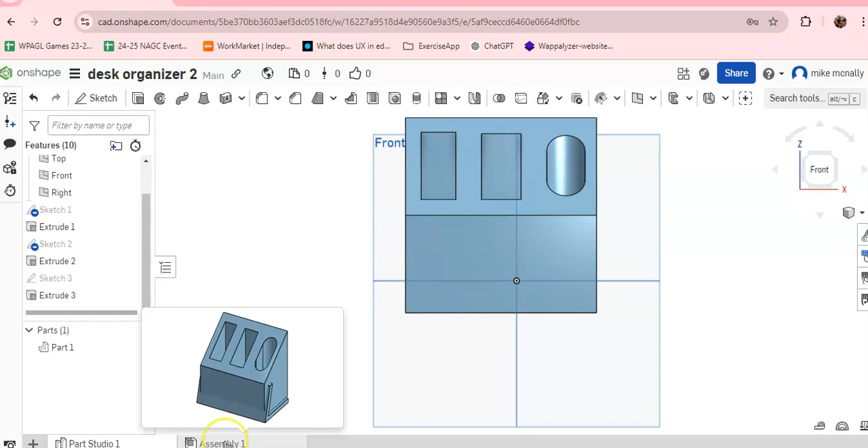Now, in this video, we have our desk organizer and we have the nameplate in another file. I'm going to show you one way that we can put this desk organizer together with the nameplate in the same part. And to do that, we're going to go into assembly. Okay, and I'm going to delete that.

So once you're in assembly, this is what it's going to look like for you. How did I get what I had there? I'm going to say insert, and we could have current document, other documents.

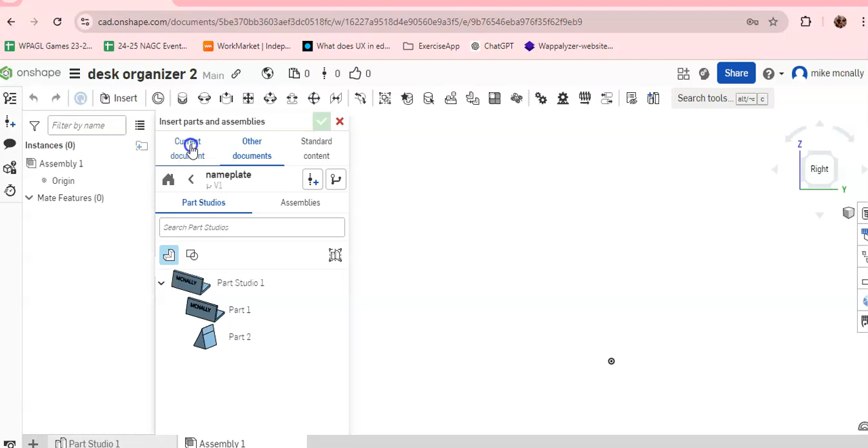Let's say current document, and there's the desktop part. You should see that, okay? And so I bring that in. You can move it around, and once you have it here, if you click on it, it's gonna. If I check mark this and then I click on it, you have these.

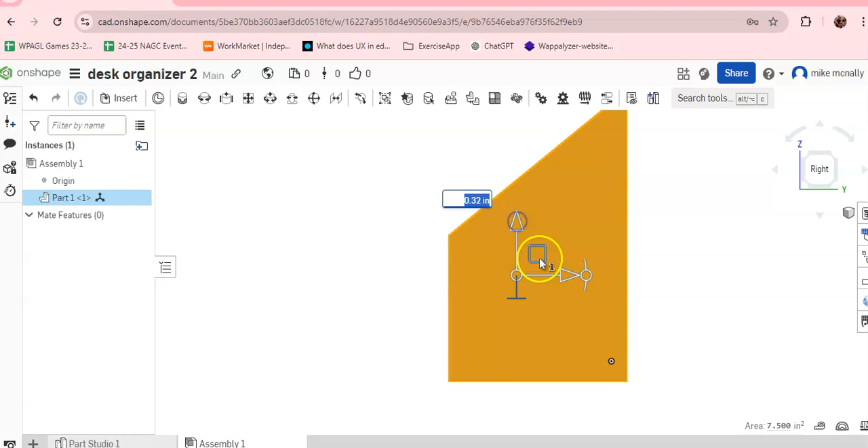You can move it up and down. You can move it back and forth. You can turn it and stuff. You can play around with that. I'm going to put it back to 0 degrees, so it's the way it was. Okay, so I've got my desk organizer part.

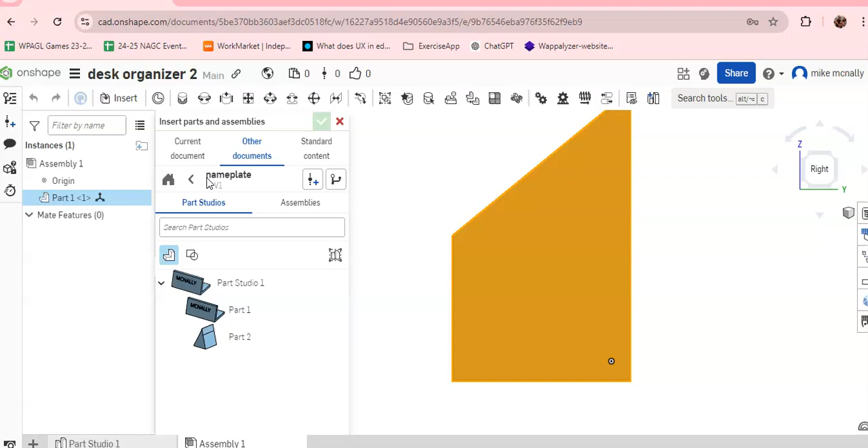I'm going to go back to insert, and I'm going to go to other documents. And you can see that for mine, this was here. You may have to go up here. When I first did this, it said it wasn't versioned yet. And if it says that, go ahead and say create a version or whatever it asks you to do. But I'm going to click down on nameplate, and now I've got them both.

Great, and I can move that around where I want. But I'm just going to leave it here for now. I'm going to zoom out, just put these sort of side by side. Okay, great, let's go ahead and check mark that.

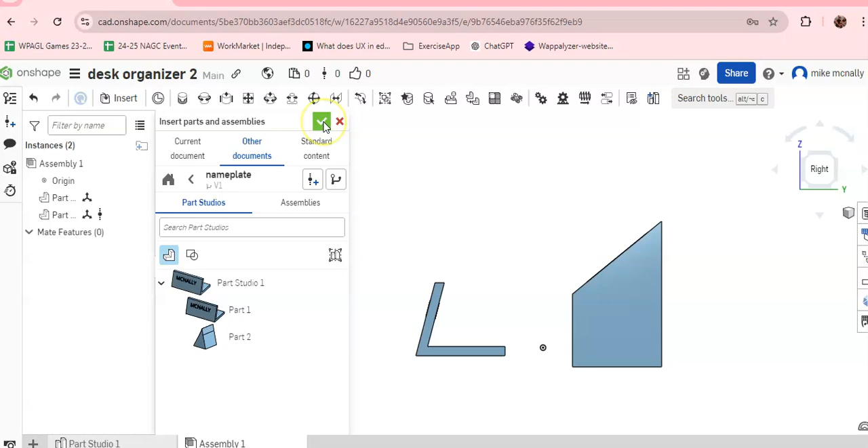Now, the cool thing about the assembly is that up here, these are called mates. And once you get really into complicated parts that you want to make, these things would become really helpful. So I'm just going to show you a simple one called the Fastened mate.

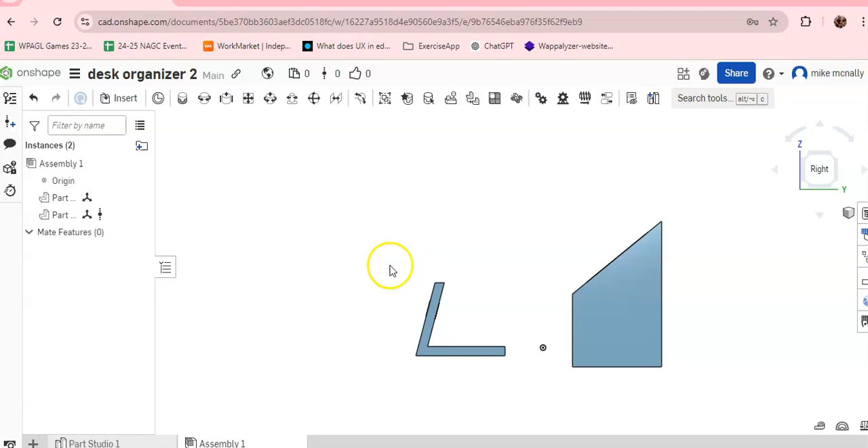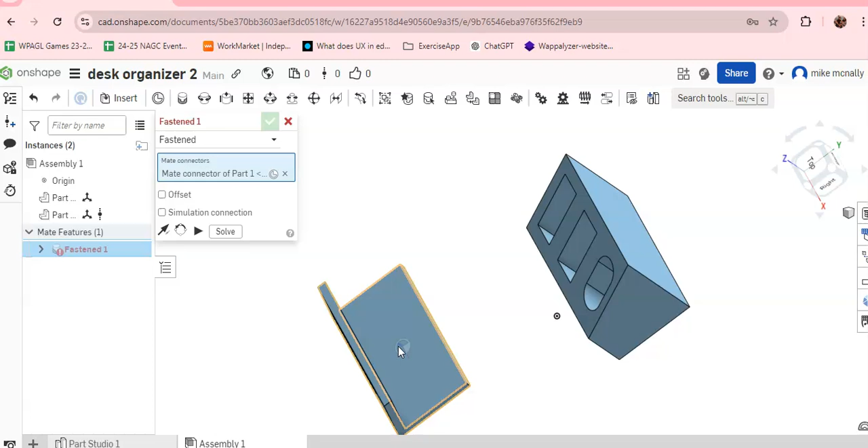So you got our nameplate, and we've got our desk organizer, but I wanted them to kind of be one part. So I'm going to hit my Fastened mate. Now I'm going to use my arrow key and kind of look at this from the top. So I want to connect right in the middle of my nameplate. And what do I want to connect right to the middle of my nameplate?

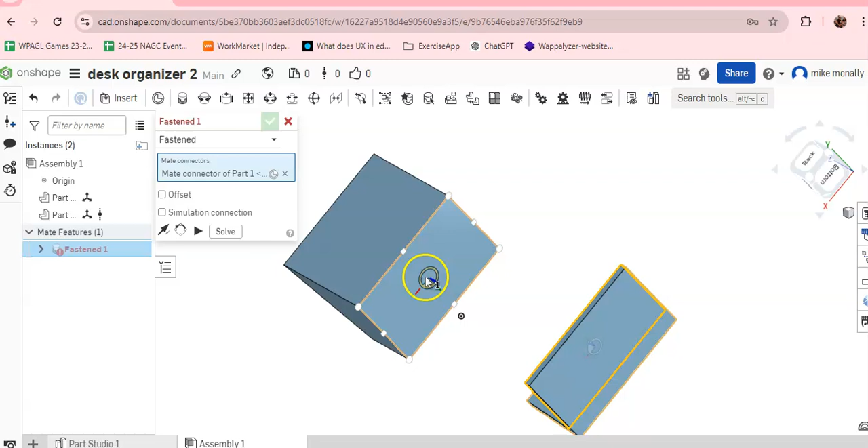And if I hover my mouse over it, I want to connect right the middle of the bottom of the desk organizer to the middle of the other thing. So I already gave it its target. Now what do I want to match to that target? This. And it put it together. Let's see what happened.

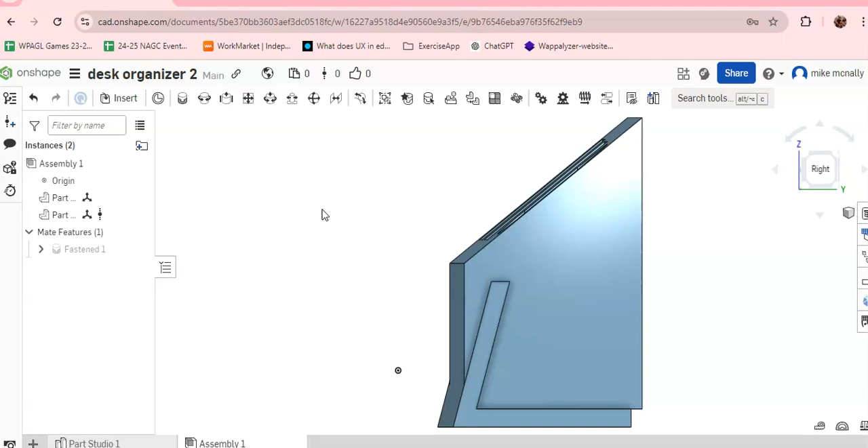Click on right. Okay, not what we wanted to look like. Oh, look at that. My nameplate was slanted, but my desk organizer wasn't.

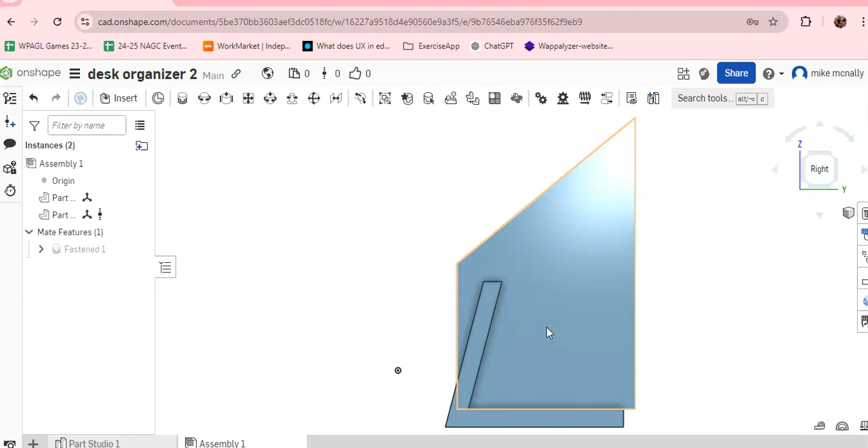There's a few things you could do. You could go back and make these match up perfectly. I'm going to show you a quick way, and this is just kind of interesting how this happens. I'm going to go back to my part studio.

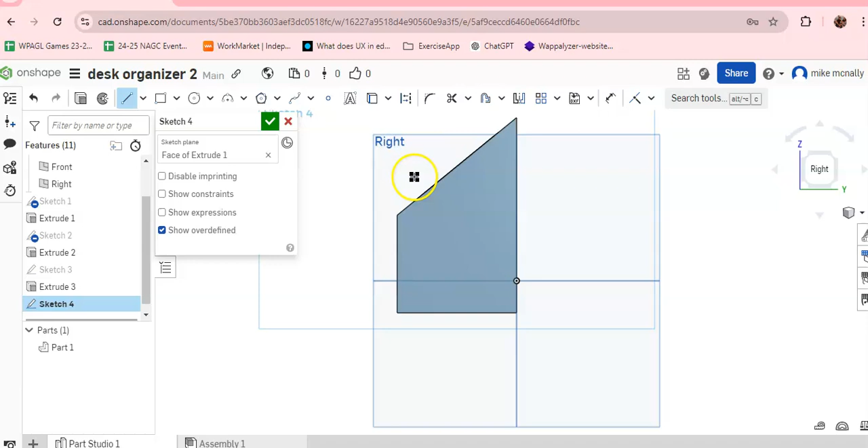Right on here on the side, this is where it wasn't slanted the same way. So I'm going to sketch on here, and I'll say right on the side, grab my line tool and go from here about, I'm just guessing. Let's just see what happens. Here, here, here. I'm extrude. I'm going to say remove.

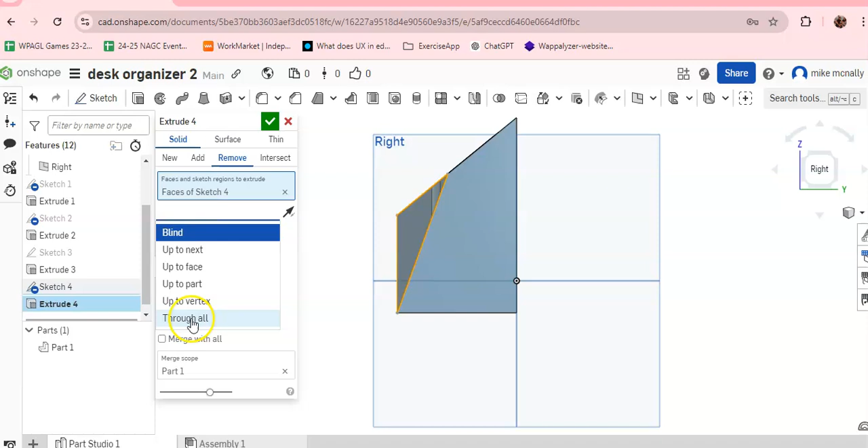And change blind to through all. Okay, so, okay, I don't love that, right? Stuff would fall out maybe. There's a little bit at the bottom. But let's go back to assembly and see what happened.

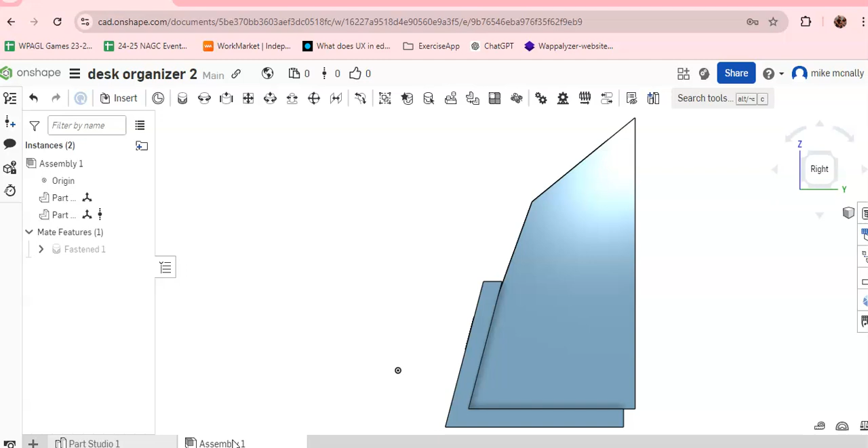Oh, it worked. Okay, and it happened automatically. It took that away when I took it away in the part studio. It took it away in the assembly too. So that's not the best way.

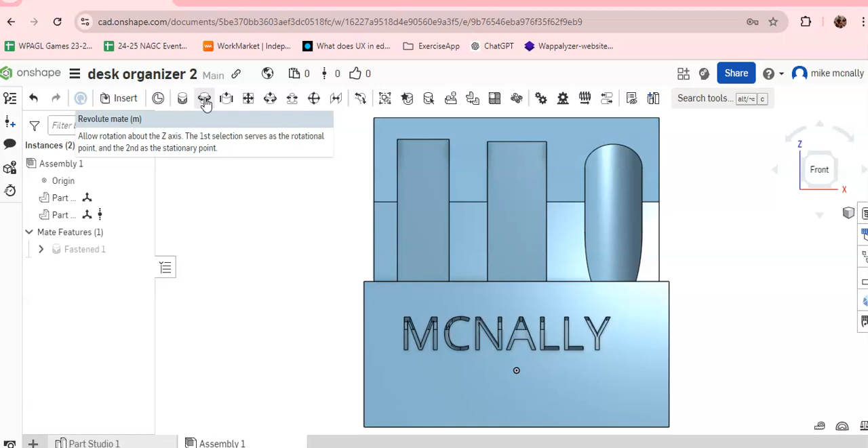You could play around and make it better, but I do want you to try that FastenMate. You can play around with these other ones too. They're really cool. You can do Revolute Mate, which if you connect two things, usually it would be a cylinder inside a hole. Let me go back to my assembly here, and let's go to this mate.

Right click, edit. If you click this arrow here, it will actually make it move and see what it can do. The FastenMate's stuck, so I don't think it does anything. But you can reorient, maybe flip it upside down. You can flip it back and forth. And if you hit the animation, it's going to show you the movement.

So for fasten, it's nothing. But if you do that for revolute and you put something that can actually revolve in something else, it will move back and forth on the screen, which is kind of neat. This will slide back and forth. This will slide in a different way. So anyway, you can play around with those, but that's the goal.

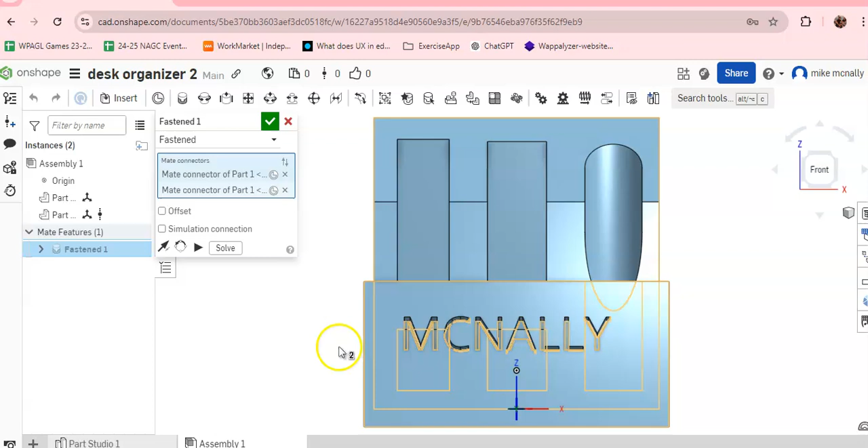I want you to use the assembly and get to a point where you've got your nameplate and your desk organizer all in one thing.